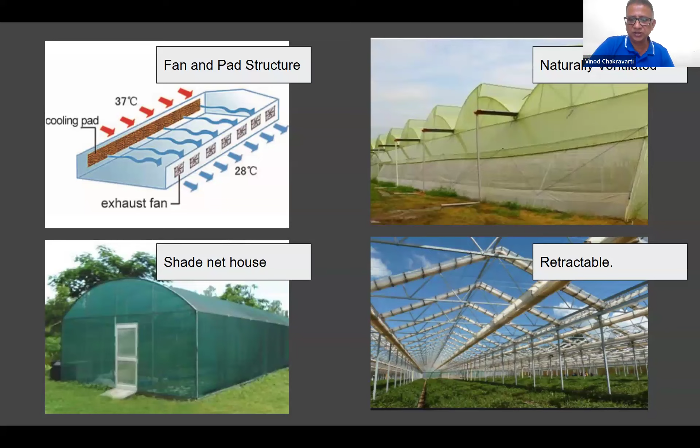Continuously, you'll have water dripping on the pad. In this mechanism, when air is sucked out from the exhaust fan, the water vapor which traverses across the greenhouse will cool it down, which is why this method is called the evaporative cooling method. So I think these slides give you a fair idea of the infrastructure.

So I will straight away move to some of the automation and explain or try to share what kind of crops or what kind of farming methodology, what kind of automation would be useful.

Okay, now just to add before that, since we have just passed 22nd September as the GST date, all the automation included for drip irrigation, GST is now 5%. The other automation, most of them are retained at 18%. So someone looking at the nutrient film technique that I covered, the automation rate continues to be 18%, whereas for the grow bag system or the trough system or soil-based irrigation system, the automation equipment GST is now 5%.

Let me start with something for regular soil or for the grow bag system, where you're looking at... is my screen visible? Yeah, it is visible.

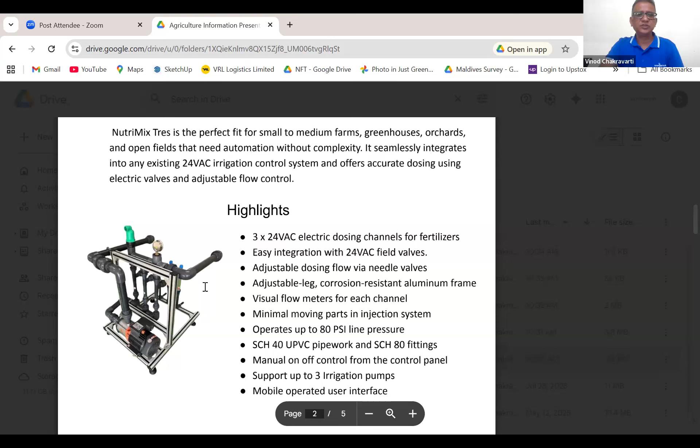For example, someone having a 20-acre farm would like to start with a cheaper product, try it out maybe on 1 or 2 acres, get satisfied, and then expand and scale it up to their entire farm. So what are some of the lower cost automations available? Basically these are for farms doing fertigation, where water soluble fertilizers are dosed to the plants. This is an example of a 3-channel automation equipment, which is a fertigation unit. So typically, what does this do?

You can adjust the dosing flow and timing, as well as ensure what should be the dosage of the nutrients you are providing. For example, if you're having NPK provided separately, for zone A you're having tomato crops, zone B a different crop. So if you'd like to work on different ratios of NPK, that can easily be done by changing the dosing for every zone. So that is one example.

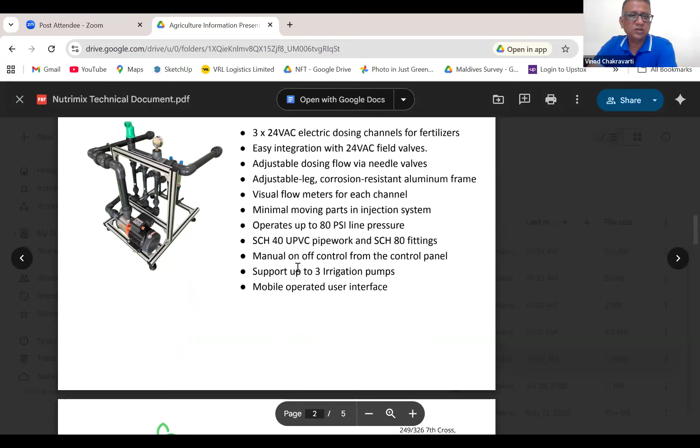But what basic fertigation units like this do not have is the ability to control your EC or pH. EC and pH is electrical conductivity as well as the acidity in the water. If that need not be monitored through sensors, then this is a good kind of automation to start with, and it's definitely low cost.

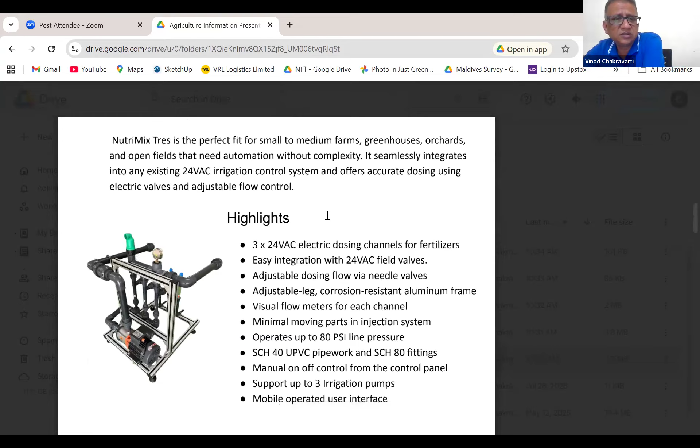For example, a single channel fertigation unit can start at 1.25 lakhs, and a 3-channel can start at 1.8 lakhs, etc.

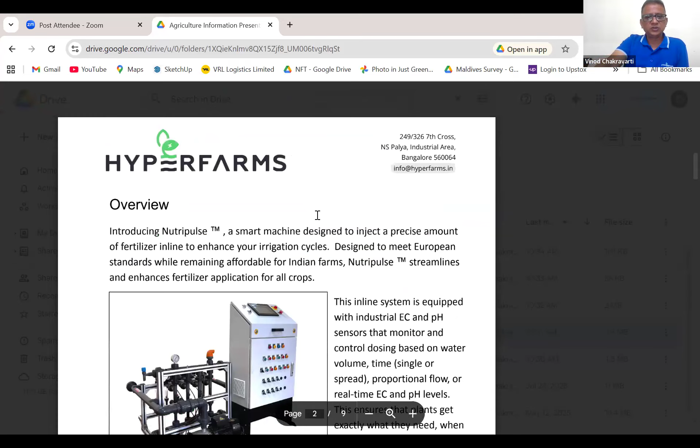A slightly advanced feature, if you want precision farming dosing, is something called NutriPulse. In this you have complete inline injection fertigation, so you have precision farming as well as control of the EC and pH. This can be used for more consistency.

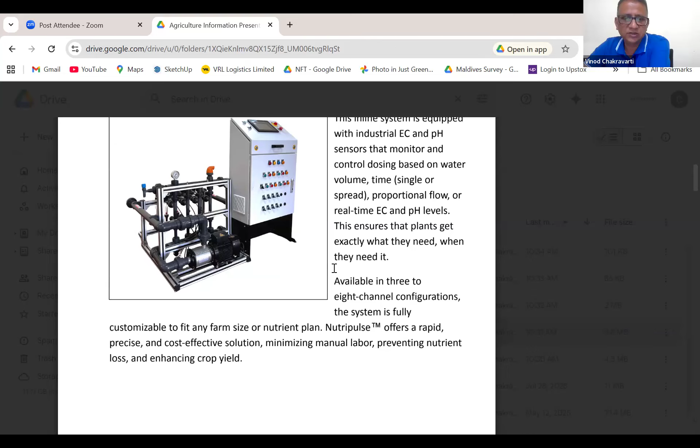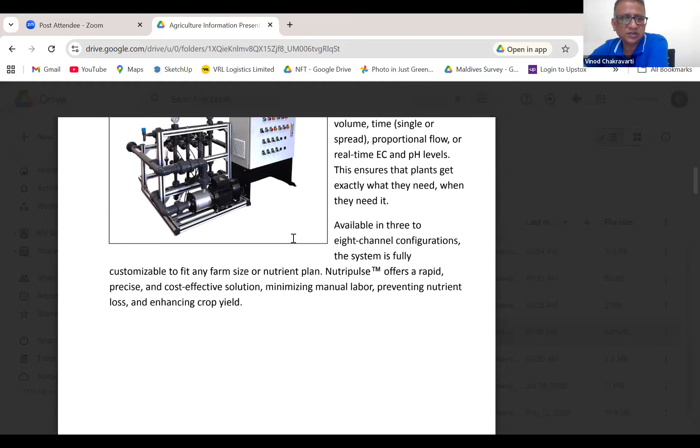And if you are looking at complete accuracy, especially for people doing R&D, or growing medicinal plants where they want accurate quality of crops, or maybe for exports, it will make sense to invest in something with much higher accuracy in output. These start from around 5.5 lakhs onwards for a 3-channel, and go up to 8 channels.

So this is on the fertigation side. Both of these are very comfortably used in soil farming with drip irrigation.

Now, what about someone who says, I'm doing complete organic farming, I don't need any fertigation, I just need drip irrigation for providing quality water at the right time, and I would like to manage it by IoT. Plus, I have a large farm where I would like to have it managed on a wireless basis. So you can have your entire farm connected by solenoid valves, and we can provide automation of plain drip irrigation, watering different zones of the farm at different timings, all set and controlled through your cell phone.

And even in places where you do not have electricity connectivity or GSM signals, these can very comfortably work on walkie-talkie technology. So even if you don't have mobile data signals, this can function. And every receiver for the valves can come with its own solar panel, so they can always work in the absence of electricity.

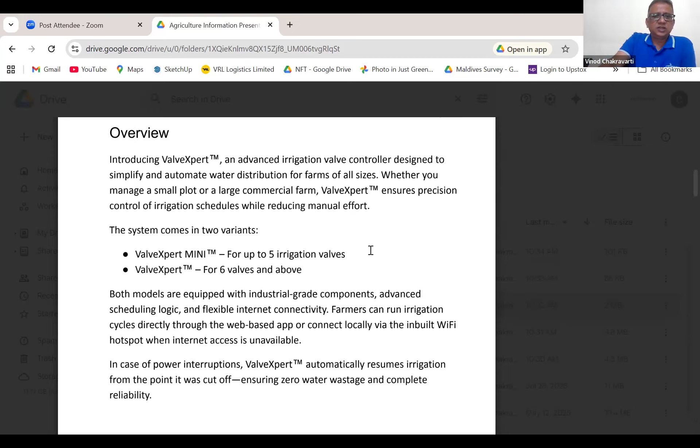All our equipment also comes with pump protection features. This is one of the requirements for farmers, because every time there's a change in phase from 3-phase to single phase, you don't want your staff to run around switching off the pump and then switching it on. All these things can be easily controlled with automation.

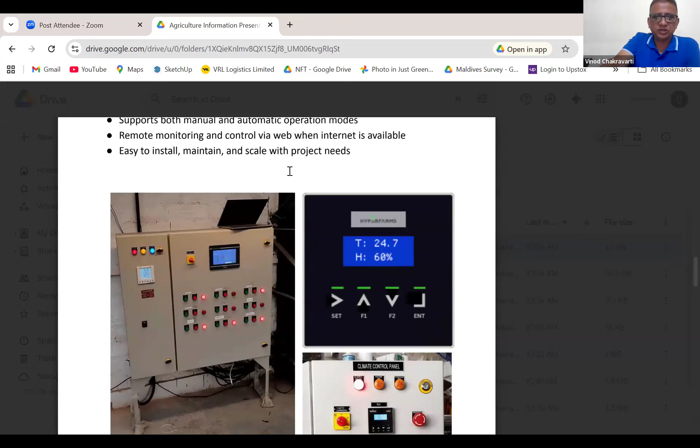This can be sensor based, so whatever is according to the poultry or other animals you are rearing, or according to the plants you are growing inside the greenhouse, you can set the required temperature and humidity, and let the equipment take care of your requirement. Simple as that, connected to the foggers or the fan and pad greenhouse. You can see temperature is 24.7, humidity 60%. Typically plants like around 50 to 60% humidity, 60% ideally. So this can be very comfortably controlled.

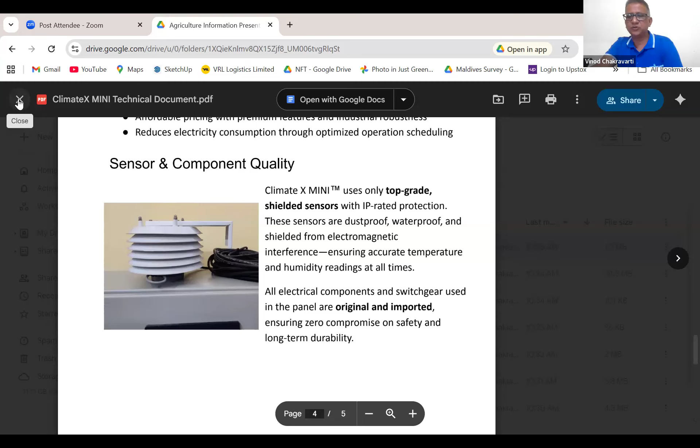I've just given a very gentle overview since I had only 30 minutes. So before we wind up on my speaking time, we'll very quickly show you some of the projects on the hydroponic side for you to have a look.

So yeah, I think my given time of 30 minutes is over, Ms. Rajni.